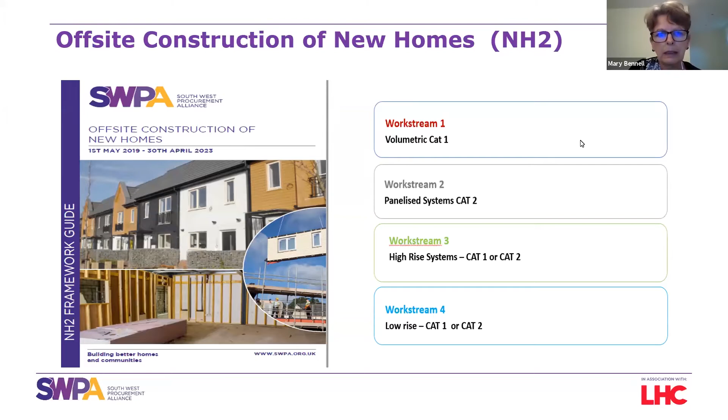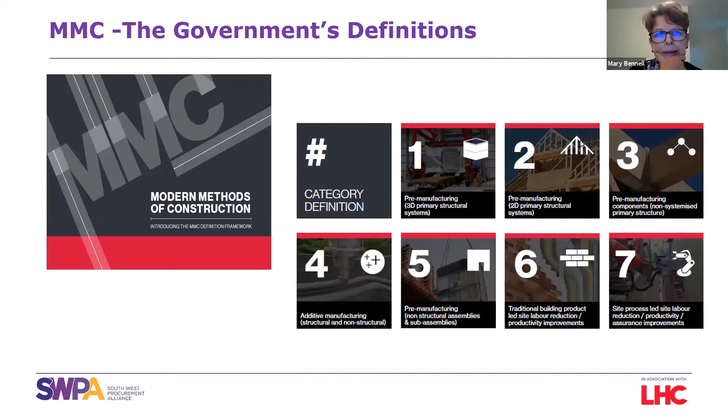So we do have a framework called our Offsite Project Integrator, where we have a range of consultants who can help people right from initiation stage right up to handover and closeout management. So if you're interested, have a look on our website, it's all there about it.

So a bit more about what we as SWPA are doing. We have 3 themes we're focusing on at the moment.

Obviously, offsite construction of new homes is one of them, but we are very focused on environmental sustainability. We're launching a new energy efficiency measures framework in November. We've been analysing our own carbon footprint, which is very interesting. I've got a slide on that in a minute. And of course, looking at zero carbon homes and how that meets and exceeds the future home standard for our clients.

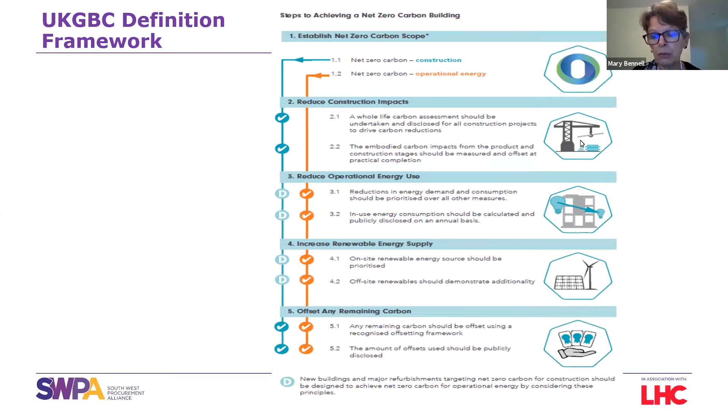The other thing we're doing, and this has also come out of the whole lockdown situation, is looking at social value in procurement. It's obviously been very important to us, generating social value through the projects delivered through our framework. And we're going to be doing a webinar with the Social Value Portal and Plymouth City Council for our suppliers on the 29th of October, to get them up to speed and talk to them about it.

A lot of them, and social value has been around for a long time, but it's about making it a meaningful contribution, and it is something that's very important to our clients. So yes, I've just been reading the Build Homes, Build Jobs, Build Innovation report, and it talks about the blockages, and there's nothing new to us as delivery people who are trying to enable the delivery both from the clients and the suppliers side. And really, that's one of our key focuses - that's what we want to do, to unlock any blockages that clients have.

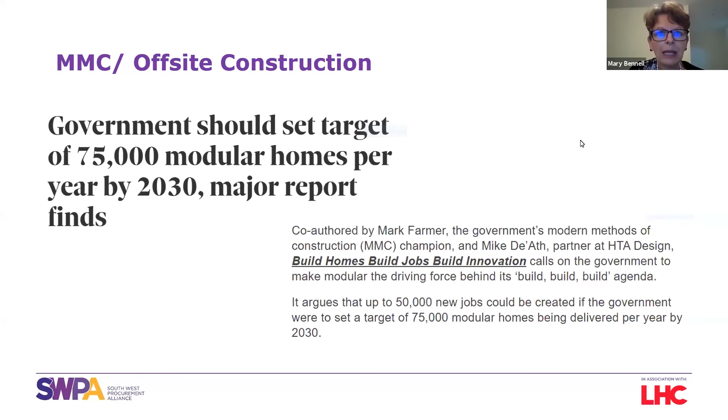So that's me. We are supporting the Bristol Housing Festival. We're sponsoring it, and we've got a conversation session coming up. So do have a look at the Bristol Housing Festival Virtual Expo and what they're doing in becoming promoters and disruptors of the traditional housing market.

Okay, hopefully you can all see the screen of the presentation. Good morning, thank you, Mary, for handing over. And it's a great privilege to be able to talk through some of the projects that we're doing and how we've been focused on delivering zero carbon, but more importantly, zero carbon affordable and modular projects, especially in the Southwest, working with LHC and working with SWPA to deliver these schemes.

Dr. Rehan Khodabuccus, I come from a sustainability and environmental design background. And Zed Pods have been established since 2016, delivering projects and working in ways to help bring forward both modular and zero carbon homes. So we've got quite an established board with a lot of experience and knowledge in there, whether it be from the design and architectural side, or the business development side on social housing. We also have quite good experience from finance and technical side, and we have Paul, who sits on our board, who's also the board director to our manufacturing partners.

So I think it's quite good to sort of look back and talk about our journey and how we've come and arrived at modular being the solution and being our route to market, and why we think modular is so good and so passionate about ensuring modular becomes almost the default for delivering houses in the modern era.

So mainly focused from looking at an environmental design background and how we were delivering zero carbon homes in the past. I was involved in a lot of sort of large self-build individual properties, which are great, and they are doing their part. They're not making the big impacts, especially in areas that have declared the climate emergency, on reducing net carbon emissions, because they don't have the volume or the penetration into the market.

A lot of the benefits you get from zero carbon living and zero carbon homes, when done right, are a reduction in energy bills and living costs. The people that should really be benefiting are those at the other end of the spectrum who can't afford it, who have to choose between heating their houses and feeding their families. They're the ones who should benefit from the net to low zero energy costs we can get delivering these types of homes.

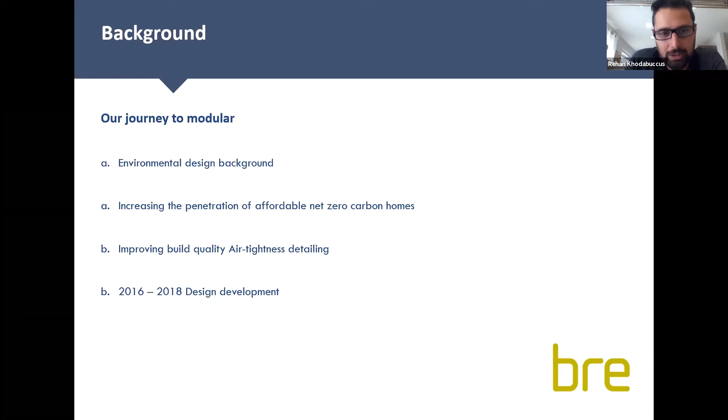In our design development between 2016 when we established and 2018, we worked with BRE, building control and local building control officers, independent building control companies, and fire safety officers, making sure we took all of that on board. When you're doing something innovative at the bleeding edge of development, you need everything in place from accreditation, warranty, and finance - we incorporated all these things so that when we were ready to release to market, we already had the answers to those questions to help with the transition.

That's led to quite a few current projects. The main one we'll talk about later is the 100% social housing project at Chalks Road in Bristol, currently under construction. It's already a multi-award winning project that we're working on with Bristol Council, Bristol Housing Festival and the YMCA, delivering a high quality, high spec net zero carbon development using different methods and a different way of building.

We've also delivered a scheme nominated for an award and shortlisted by an NHS Foundation Trust - a low carbon key worker accommodation scheme completed in 12 weeks during the peak of the COVID-19 pandemic. It really shows the other benefits of modular construction: we can keep going when other building sites are facing trouble, and we can deliver a scheme very quickly with little knock-on impact - I'll come back to that later.

That led to a scheme similar to what we're doing in Bristol, but slightly larger, with the London Borough of Bromley, currently under contract. We also developed that to work with the Wildlife Trust, specifically Lincolnshire Wildlife Trust, and Natural England, delivering a scheme approved by the Environment Agency to build using our build methodology in a flood zone 3. Combined with other aspects of how we design and make connections and the evacuation policy, we can build using our standard building system in flood zone 3, which is very good.

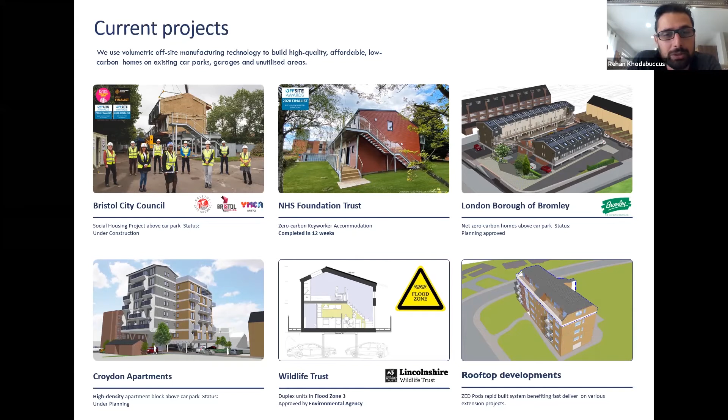But really the focus of what we're doing and talking through today is why modular, and why modular for social housing, and when we decided that, what were the key issues we faced and how we looked at overcoming those.

So Zed Pods, my colleague Devansu, chaired a roundtable conference meeting organised by CIH, particularly focused on MMC-led design developments, including senior housing professionals from various local authorities nationwide. It focused on areas such as education and awareness gaps, and how we address those and show the different types of modular building and different applications to make sure that what we're doing is fit for purpose.

How we look at different methods of engagement across the local authority or housing association, from procurement, from legal, and also on the pre-planning side, how we get local stakeholders, political stakeholders, and everybody else on board with what we're doing and understanding the routes of modular.

And then focusing on sustainability. We come from a sustainable design background, and that's our focus and our ethos. Using modular to really anchor that into the design, so that when clients are demanding more sustainable buildings, we're actually showing that we're doing that via modular, and it's not an add-on, it's part of our core philosophy.

And then we looked at the procurement issues, part of our work with LHC and with SWPA, and how we've used that to develop the projects I've been talking about. And then how we've really instilled the quality in what we do, to get quality build throughout the marketplace, showing that we're not doing temporary buildings, we're doing permanent buildings at a higher quality than what's currently being turned out through a lot of traditional built schemes.

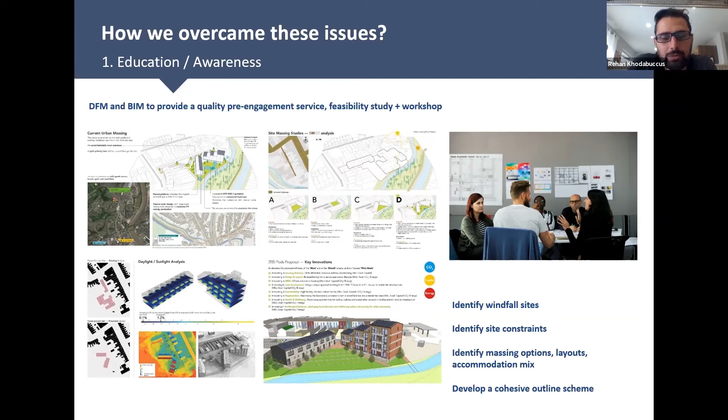And then moving on to more of the engagement barriers, a lot of these are the pre-planning, pre-engagement barriers. When you're doing something different or new, how do you engage those stakeholders, and how do you get them involved as early as possible?

It's across not just the stakeholders in terms of clients, planners and local residents, but also within the client's different departments, such as legal, procurement and finance, so they understand the intricacies of delivering a modular scheme. We've looked at very different ways to engage.

We did a lot of exhibition work, especially bringing our fully designed, functioning modular housing unit to different exhibitions, starting with the Bristol Housing Festival, and with EcoBuild, Future Build and places like that.

We found that a very good key and good tool to use, because it helped distinguish ourselves from what the market might have been thinking back in the early days of what modular could be, differentiating ourselves from prefab and temporary buildings, showing that what we're doing was a permanent building, just done a lot quicker and manufactured in a controlled environment to a high quality.

It really helped demonstrate the speed of the build and construction, because if you can build something for an exhibition, you know you've only got a few days to do it. But what we were finding was that when we worked with some of the local councils, we were waiting for the council to close on a Thursday evening for everyone to leave.

We brought the demo unit down on the Thursday evening, got everything ready and connected to the temporary power supply, so that when everyone turned up in the morning, all of a sudden on the Friday morning, there was a house there.

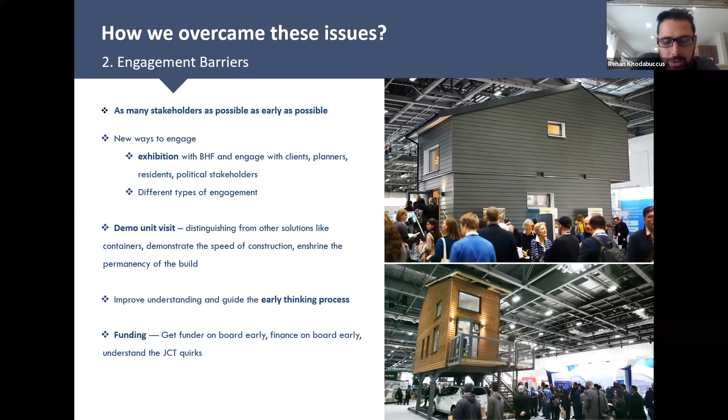It also helps shape the understanding and guide the early thinking process, so people understand there are a few quirks within the JCT of how modular building works, how we deliver a project within local authority, within the JCT, and explain those changes and amendments to the standard contracts so everybody is on board. If we do that very early on, it avoids surprises 6 or 7 months down the line when you get into contracts after the initial procurement works.

From our background and what we do, it's a focus on sustainability - the minimum we're doing is SAP A rated, delivering schemes that are net zero carbon, incorporating all the different material choices and technologies we can, such as triple glazed windows, stone wool insulation which has a fire classification of A1, and different MVHR and air source heat pump strategies for the size of units, so we have a low carbon system that works for things below and above 40 square meters while still meeting those high SAP ratings and net zero carbon ratings.

Because they're all electric buildings, we can look at how we incorporate solar roofs to offset the residual electrical demand, and how we work with daylight and sunlight analysis to maximize passive use of energy, so that when we do have to put active energy use in, we've minimized it as much as possible.

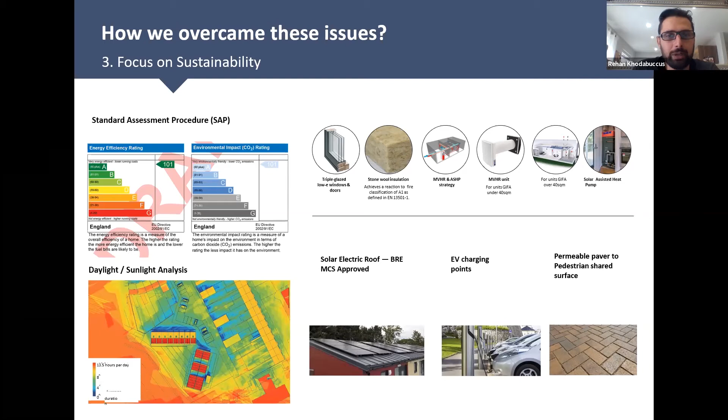Other bits within overall sustainability include future-proofing your car park or parking facilities for future residents. As the electric car revolution gains a greater foothold, we're going to need that electrical car parking infrastructure, so let's build it into the schemes we're doing. We also define shared pedestrian surfaces and use permanent and permeable pavers to feed into our SUDs and put holistic sustainable development principles into the types of schemes we do.

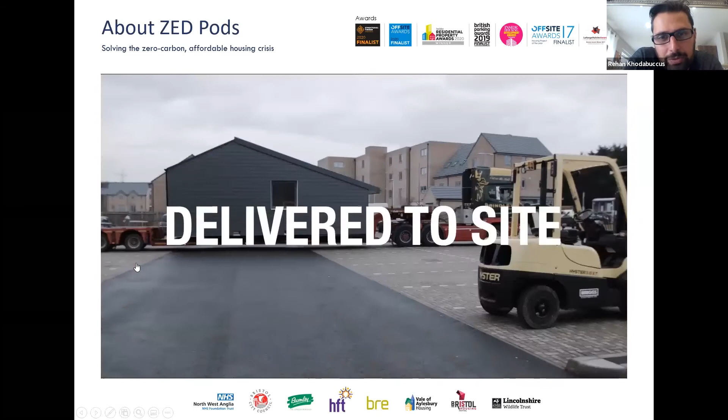We're really proud of delivering this development - how we built it offsite, showed all the benefits of building something offsite to meet such a tight, unmovable deadline, and how we interlinked the site works with what we did in the factory so we minimized the amount of time on site, installing all the units basically over a weekend.

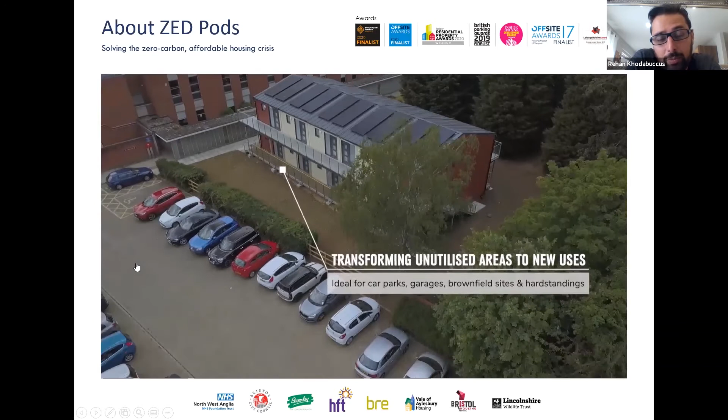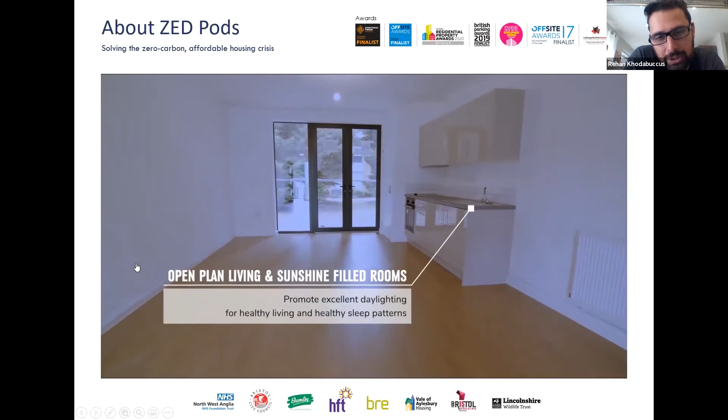We started on the Saturday morning to put the bottom units in. We got almost all the units in on the Saturday, with a bit of high winds so we stopped, then fit the last units, and all the heavy plant was off site by Sunday 11 o'clock.

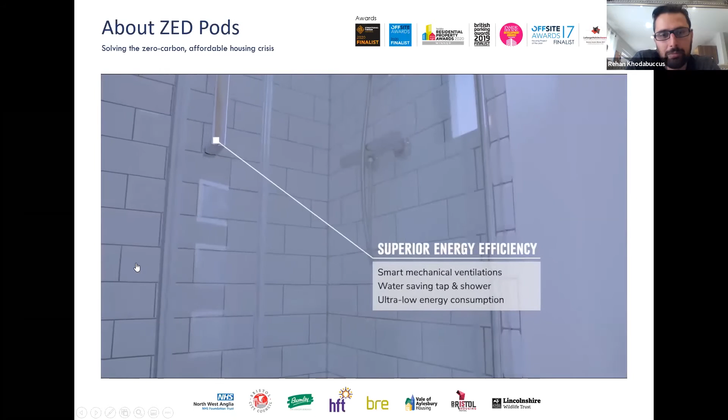We use daylight quite a lot, and nice finishes - we try to put natural, proper tiling in where we can, so when you get into these buildings you see they're permanent homes, not borrowed from temporary type accommodations such as park homes. We use what you'd find in any traditional home to ensure that permanency and quality really comes through.

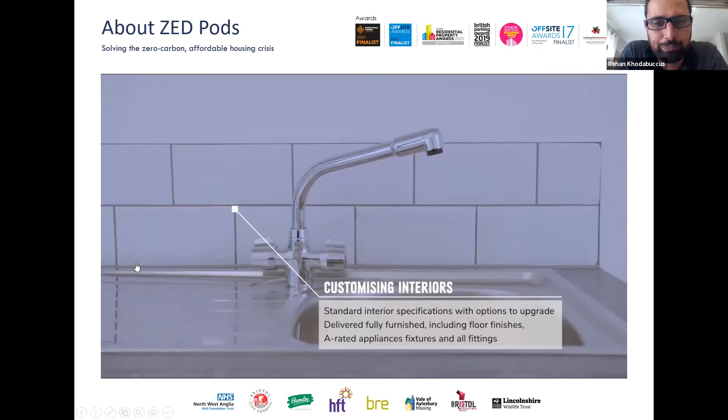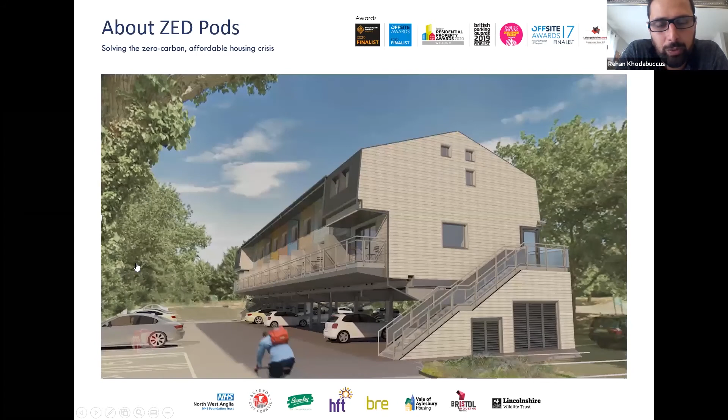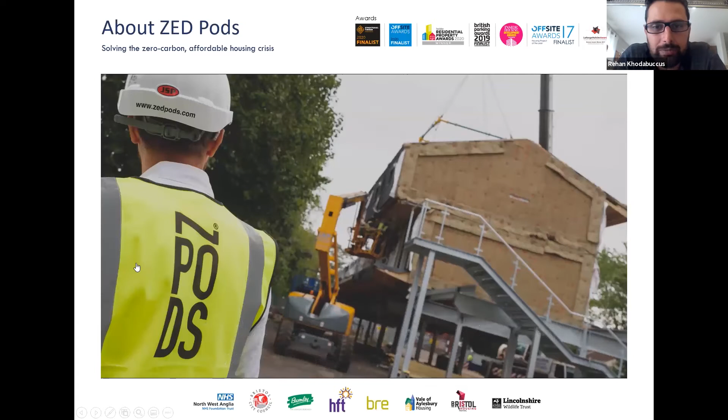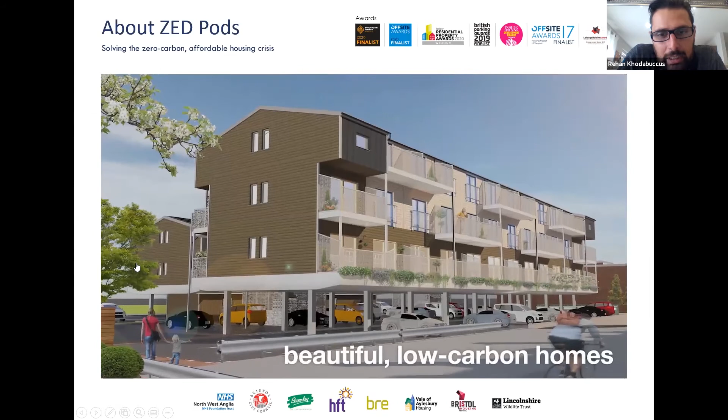Even though we're doing standard designs and working on our grid-based model, there's still a lot of flexibility in terms of design and finishes. It's not one-size-fits-all, we can do different things for different clients and projects. That really comes through in the Bristol scheme, which you're seeing on screen as we're installing and lifting in place, and that's led on to what we're doing at Bromley for the LHC framework.

How did we overcome the procurement issues we were facing, and how did we ensure we were OJEU compliant and work with LHC and SWPA to establish the benefits of low carbon and modular development through the NH2 framework? How do we internally demonstrate best value in the tenders and contracts we do, to ensure that even under contract award conditions we show best value within the contract itself?

How do we work collaboratively with LHC, SWPA and clients to understand the different forms of award and how to award projects under the framework, bringing in clients from legal, procurement, and all parts of the public sector procurement process, so they understand how it works - expression of interest, competitive award procedure, mini tender, but also, quite key, how to do direct awards, like how we've worked and been awarded projects with a client before, and how that can be used within the project call-off procedure, and how appointed companies can demonstrate their quality to enable works to be awarded.

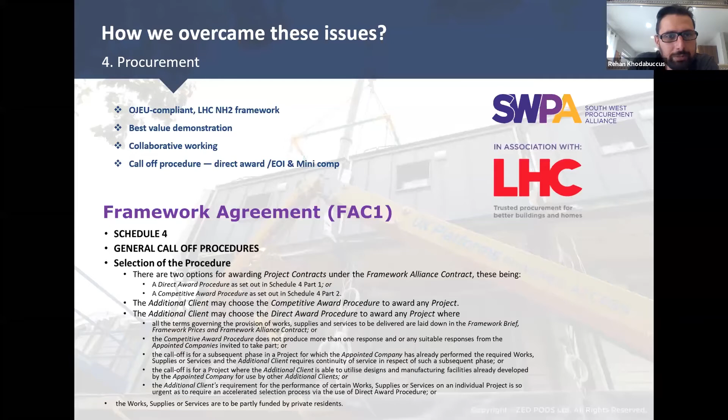That leads nicely into the types of quality we're trying to bring into the market and environment. We've had to go through BOPAS - we've got two different build systems, on our steel system and our cross-laminated timber system. It really helps set the benchmark of the minimum required to show we can go through the two mortgage cycles that the funders want.

We use an ISO accredited 9001 manufacturing facility, and we've worked with different structural warranty providers so we've got that range of provision - some warranty providers work better for private clients, some for housing associations, some for local authorities. Then we install the design life, the materials, and material sign-offs, to ensure everything has the design life expected by the client.

It also has minimum maintenance - yes, it's slightly different to traditional build, but it doesn't have any onerous additional complications for facilities managers or estates management to look after. It's very simple to maintain in the future. By doing that we get the F&M people on board, showing that zero carbon modular is almost easier because of how we use BIM, with different suppliers and components attached within the models, which helps facilities management going forward.

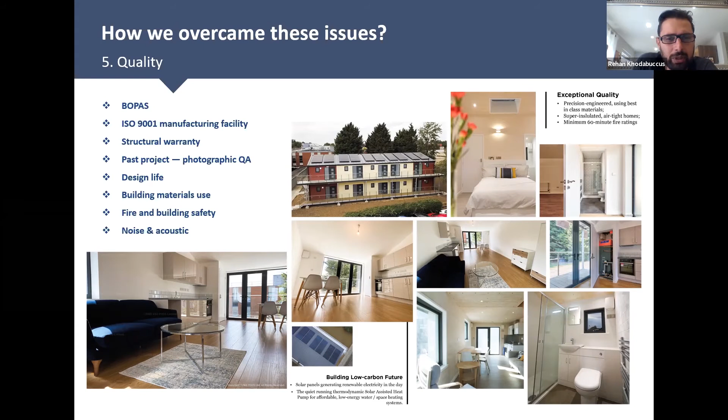With all the work we've done on fire and building safety regulations, where we need stricter systems - mainly party wall detail or robust details - we've covered all of that and worked with building control, local authority, and independent bodies to show we're meeting those standards and can fit into existing portfolio management, bringing normalcy to the innovation and making what we do as boring as possible, so it's understandable and doesn't seem far-stretched to do something different.

And we brought all that together. It's good to contextualise that in what we're doing with Bristol Housing Festival, Bristol City Council, and the YMCA, which was awarded under the South West Procurement Alliance for a 100% social rented scheme.

So it's currently under construction. We've done quite a lot, and again we've shown quite a lot of the benefits.

We allowed 10 days to put the piled foundation system in, and we actually got it in within 3 days. We allowed 2.5 weeks to put the steelwork in place, and it actually went in within 4 days because everything just fits in terms of the BIM, the manufacturing, and the design detailing we've done.

We got all of the first row of the bottom modules in place within 1 day, got all of the top rows in place within another day, and on the 3rd day we put the 2 two-bed unit bookend sites in place.

Essentially, even though we planned quite an aggressive 6 weeks to get all that work done, it was actually done in less than 2 weeks. So even with planning in some contingency and delay, we can still almost reduce that time by 50%.

What we did was work with the local authority, Bristol Housing Festival, and the housing development team to find a suitable site, a suitable car park, to deliver a scheme near to all the local shops, near a local supermarket, with all the facilities within walking distance to the local train station and good bus connections, so that when doing something for social housing, it's within all the amenities they're going to require.

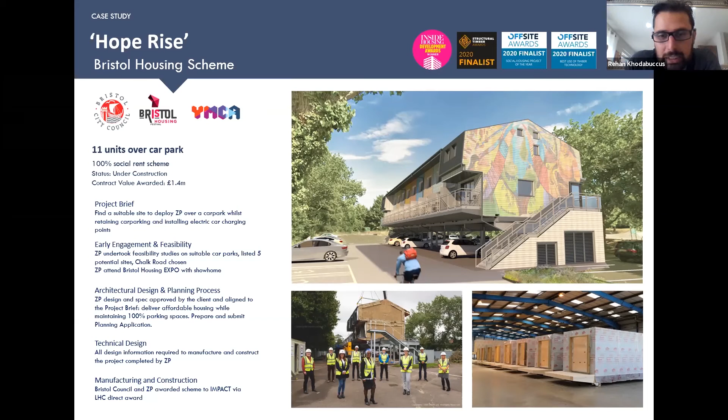You can see the journey from production facility to how we do the air tightness detailing, to how we install everything in the factory at low level, how we then installed and communicated using the communication boards within the factory and within the site, how we installed the steelwork very quickly, and how the modules are then craned into place.

We've gone from years to months to weeks to days now in terms of offsite construction, and it really shows what can be done and what can be delivered.

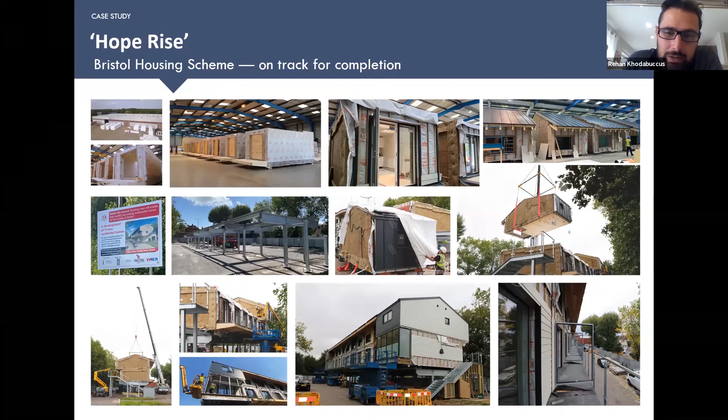Hopefully this will be a very good tire-kicking scheme for everyone to show how we deliver modular and how we help build social value into the schemes that we do, and how Hope Rise is going to be not just a zero carbon modular scheme, but a zero carbon modular community.

Part of the work that the YMCA are doing, and part of the social value we've shown, is how we impart education and training, what we've done and how we've done it, how we work with the local council, local schools, and the social value contract we have with Bristol, and how we work with the YMCA to bring in these community builders.

So that the people moving in have got a first port of call to come to, and the community builders are involved to help if there are any problems, isolation issues, or health and well-being issues that could perhaps be sorted almost informally, rather than relying on the established infrastructure within the care system, helping relieve some of that burden.

If we can do that and help instill those upward spirals and help build that community, hopefully we can see greater benefits beyond just housing, but also anchoring it into the types of people living in these schemes, improving their quality of life, improving the distribution of resources.

And how we can lead to a new way of thinking, a new type of community that we can build within local communities by using what is essentially a modular housing community combined with low carbon design, combined with key providers and key stakeholders to deliver something that really could be quite special.

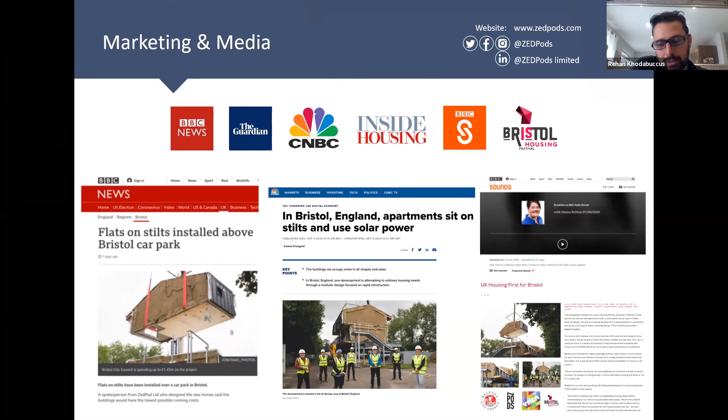So thank you, and hopefully you found that interesting, and I've covered a lot of what you wanted to hear. I'll happily hand it over to take some questions moving forward.

Thank you very much, Rehan. We have a couple of questions in the Q&A. Can you see them? They're definitely for you, not for me. Can you see the Q&A button, or shall I read them out to you? Let's have a look. Have you got the Q&A there? Yeah, I've got them up here. Let me just move these up so I can see them.

So, what's the embodied carbon load in the delivery process per dwelling? How do we account for material sourcing and transportation?

Originally we were using cross-laminated timber, and we love using it—it's a great building material. It's quite low-grade timber that gains strength through how you laminate the different panels together to make the CLT panels. It's closely processed and FSC approved. They do a lot of planting, and a lot of the waste materials get turned into CHP wood to power the factory and provide local heating to nearby villages, which is really, really good.

But we don't make it in the UK yet. We've tried to convince partners in Scotland and Wales to do it. There's a lot of commitment involved, especially in the types of timber we use, and we'd like to source it from the UK. But that's why we've had to look at different sources and materials, and why we have both a cross-laminated timber solution and a steel build system.